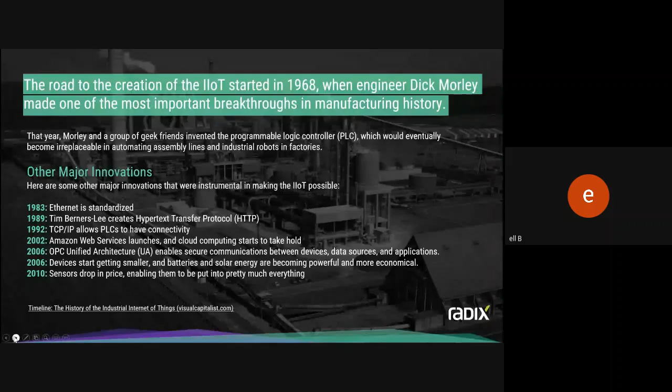So the reason I set that up, the reason we want to talk about the use and collection of data and the path towards computers, is because all of our problems that we are really trying to understand, that we would use AI for, that we would use ML, that we would use process control. In a lot of times, process control started off very simplistic, but as we were able to capture more data, as we were able to start to remove obstacles between processes, we moved from having single base problems to multivariate problems.

And so in multivariate problems, you need more data. You need to capture the data, move the data, analyze the data. And as we got to this, we started to be able to remove the obstacles that time creates, move the obstacle that geographical limitations, whether it was the geographical limitation of having 3 plants placed at different places around the world, having 3 suppliers that are in different places around a state, or even having 3 different process areas in the same mill, and those process areas all feeding a centralized component or centralized process, and then having to understand where the problems were being created in our raw materials that were affecting our final process.

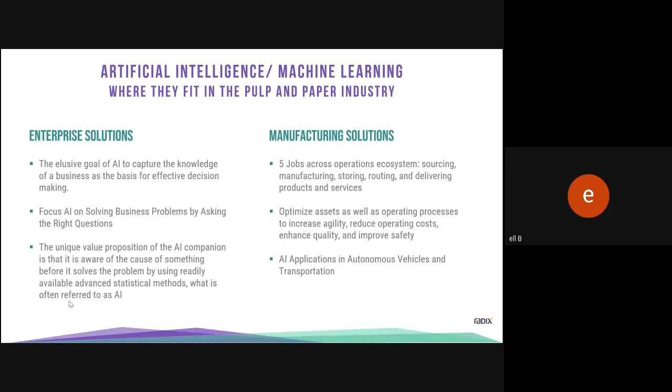So with the mindset of AI for a business level, enterprise type AI and machine learning is about trends, about business trends, about making the right decision and reducing the risk of a business decision. So I wanted to share this type of example.

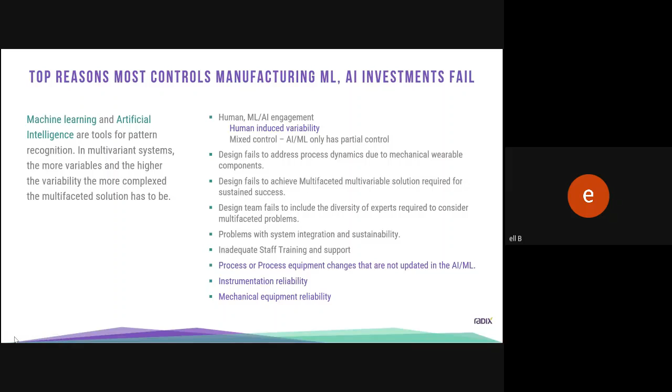So that ends the AI, the AI focus.

So process controls. Humans historically have been designed into the manufacturing process. If you think about it, we've always had a mindset that we were going to install the human either to save the day or to make a decision, but we generally always design humans into our process control. So manufacturers today are slowly trying to reduce the human dependence. The reasons for this are multiple, but at the top of it is baby boomers are retiring and we just don't have as many people in manufacturing as we used to.

Because of that and other things, we are trying to design our systems now to be less reliant on humans. But if I look at the key components of a process control system, the first one is the operators. A true process control expert has to design his process control system to work with the operators.

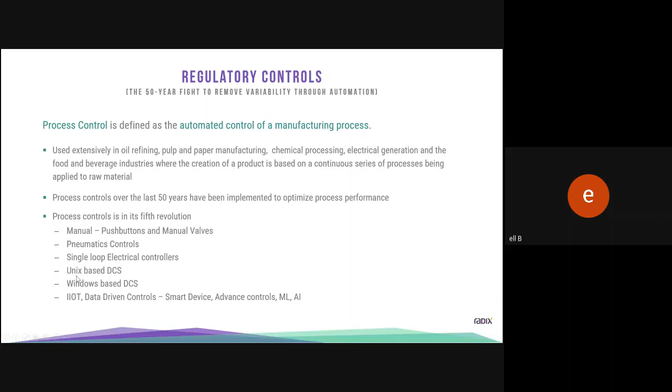So when you look at dynamics, you have short-term and long-term dynamics. Short-term dynamics, single loops. It starts with having controls that run in manual. It could be caused by measurement issues. It could be caused by individual loop tunings. It could be caused by a single point of tuning in a highly dynamic process. Let's say you have a process that runs 5 different grades, but you really only have the loop tuned for a single grade.

Local process dynamics are generally longer term, but they may be a process dynamic where you have multiple loops run in a cascaded scheme, and one or more of those loops creates a long-term dynamic that the entire process is subjugated to. So you see a continuous swing through the process, but it's really just that process. This is unfortunately quite normal in systems where you have cascaded loops.

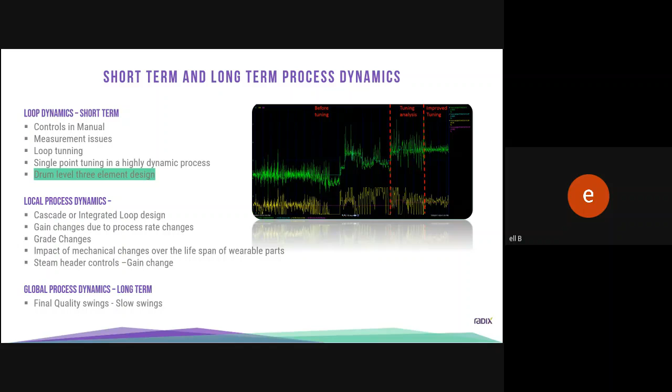In a facility where you have a single user or a boiler that is so large that it can easily sustain the facility, you can usually run a single element control because there's nothing creating the disturbance. In a facility where you have multiple users pulling on the steam header, that can cause disturbances, that can cause variability, then you need a lot more complex control scheme in order to drive stability or to reduce variability.

In short, in that case, you need some feed forward that goes into the system to help address the variability. In both cases, we would want to control feed water flow that's going to the drum.

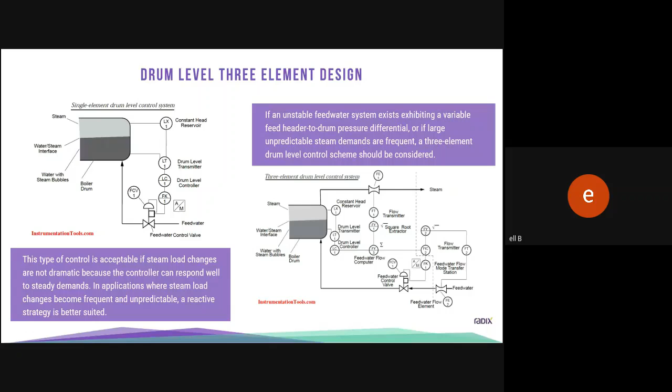So from a drum level control to a steam header control. Of course, the drum levels are part of the boilers. When you think about steam headers, the most interesting part of a steam header is it is actually designed to have multiple gains. If you think about how the gain of a header works, the heat in the steam creates the potential energy.

The rate that steam is being pulled out of the header creates your flow, and that then impacts the amount of potential energy that you have to keep in the header. So what happens if the header goes to a low pressure situation at the same flow rate? Well, you just had a substantial change in how much energy you have in the header.

Therefore, you're going to need a different reaction of your valves. Same thing if your header is at its normal pressure, and at its normal pressure, you see a flow decrease. Once you see that flow decrease at its normal pressure, you require a different response out of your control valves. Otherwise, it's going to overreact.

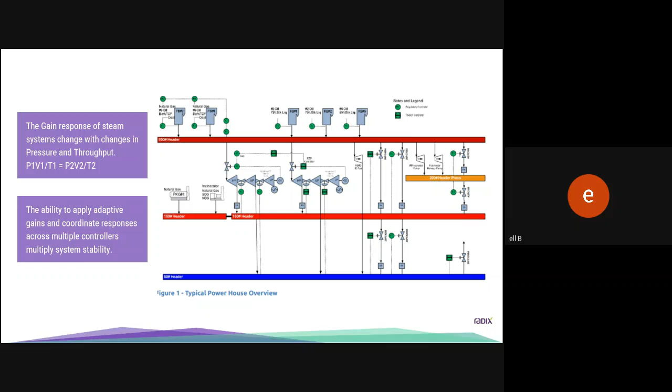And finally, I would like to bring a poetic inspiration that I believe has a lot to do with the theme of this seminar, because when we are faced with two or more possibilities, which road to take? And this is the poem, The Road Not Taken, by Robert Frost.

Two roads diverged in a yellow wood, and sorry I could not travel both and be one traveler. Long I stood and looked down one as far as I could, to where it bent in the undergrowth. Then I took the other, as just as fair, and having perhaps the better claim, because it was grassy and wanted wear. Though as for that, the passing there had worn them really about the same. And both that morning equally lay in leaves no step had trodden black. Oh, I kept the first for another day. Yet knowing how way leads on to way, I doubted if I should ever come back. I shall be telling this with a sigh, somewhere ages and ages hence: two roads diverged in a wood, and I took the one less traveled by, and that has made all the difference.

It is the change for the process control one. You just passed it. Go one more, it was the second, one more.

The mindset behind pneumatic controls, how you deployed a pneumatic control, was actually different than how you deployed electrical single loop controllers. How you had to deploy a Unix-based DCS is actually different than how you deploy a Windows-based DCS. Those are the top four. Now in this fifth one, and I know people want to say the fourth industrial revolution, but in the fifth controls revolution, it is very much a mindset change from Windows-based DCS that are local to a site, to a data-driven analytics, smart devices, ML, AI process control system. That's why I say the fifth.

Understood. My concept also includes the cognitive systems inside of the smart device and human interaction with it. So it's a definition. I would love to follow up more. I know we have 20 minutes left, but I will reach back out to you because I would love to discuss that more. Okay, thank you very much.

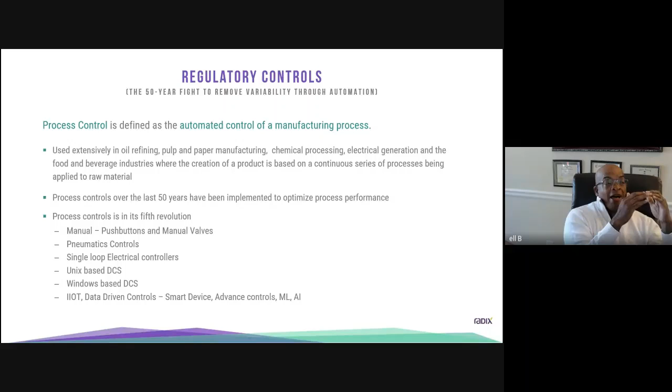Well, now you can take multiple mills and put them all on a dashboard together, or you could use analytics to quickly baseline multiple mills and identify who's the highest performer, and use that high performer to compare against your other mills. So the accessibility to data has been absolutely great. It is just a game changer in itself.

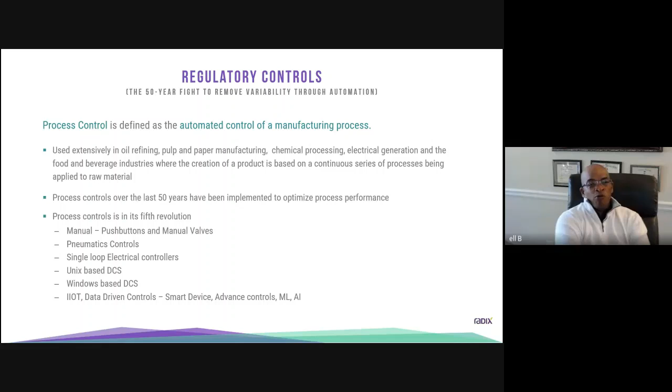Likewise, the accessibility to look at a program in one facility and then take that program and deploy it in a different facility, having never been to either facility, is just absolutely game changing. So there are a lot of things that today's engineers are capable of deploying that will allow them to work from home, and they'll never really understand some of the struggles that were previously in existence.

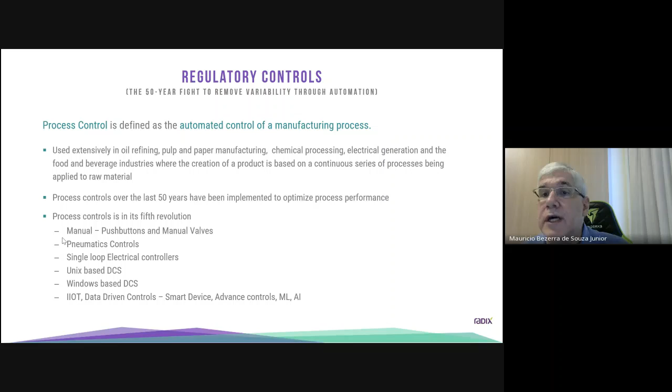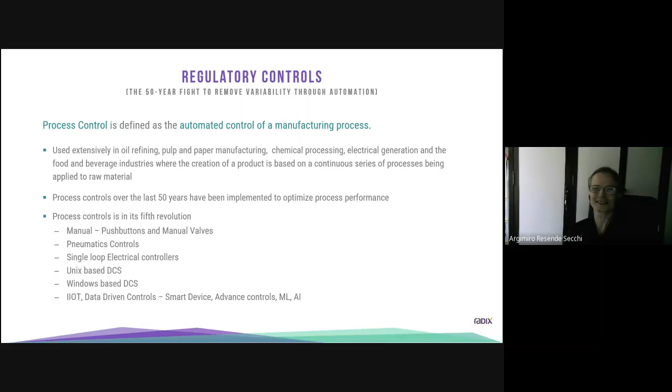A technical question about, if Elliott would talk more about your experience in the pulp and paper industry regarding AI and ML for adaptivity, regarding the short, long-term dynamics, and also the machine changes its parameters and behaviors, and how the AI and ML are doing well with this problem.

The biggest opportunity is in the knowledge of the architect, right? So I put in there about the problems of dynamics, the problems of how you architect the solution. I'll give a couple of quick examples.

Years ago, I worked with a company. They came in and said, hey, we're really knowledgeable, we know what we're doing, we can help you figure out strength properties on the machine. And what they did was say, we're just going to go do one large model, and we're going to model the strength and see which parameters are impacting strength.